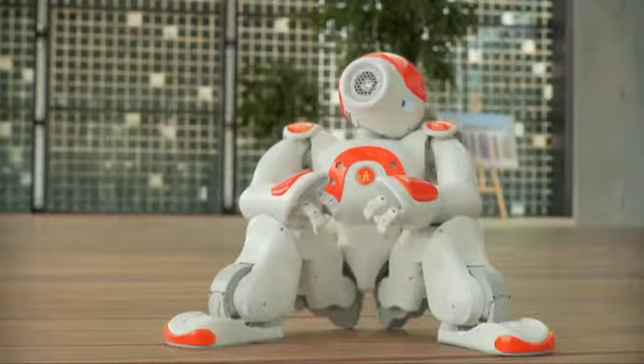I want to come with you.

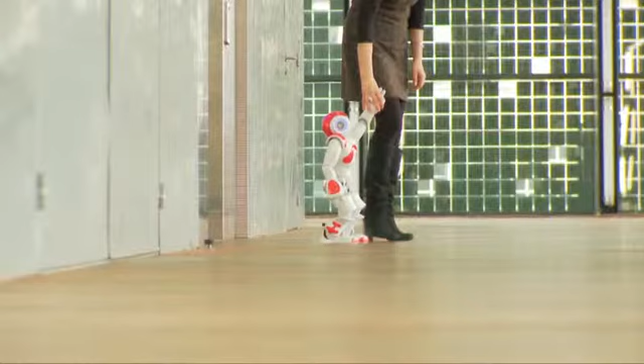Our goal with robots is to have robots helping people, and not only the geek. I want to have robots helping everyone. But in order to do that, we need to have the robot accepted by people. I'm Bruno Maisonnier, head of Aldebaran Robotics, founder and CEO of the company.

Give me something, please.

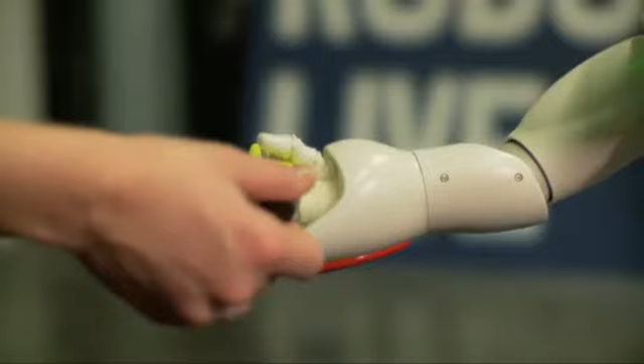Thank you. We think that the robotic market is going to be huge in the future. And this comes from the simple fact that the world population is aging very fast. And we need robots to do whatever they need at home.

What do you want me to do?

When people are depending on someone else, they need to have someone else helping them, they are in a secondary position. But when they have a robot doing that, they are in the first position, they are leading. Notre Dame University in the United States, they are really working with robots helping autistic kids. So we discovered that robots are objects they can interact with, they are comfortable with interacting with robots, they like it.

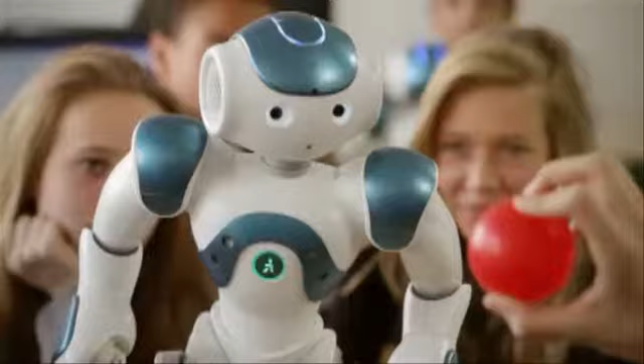The first impression that you get when you see the robots is the outside shapes. If the form is too aggressive, you won't interact with that robot. There are many people ready to develop software, but we are just lacking robots. We are just missing robots. So that's why Aldebaran began with a platform for providing all those who want to explore this new world, who want to be part of this revolution, to be able to do it.

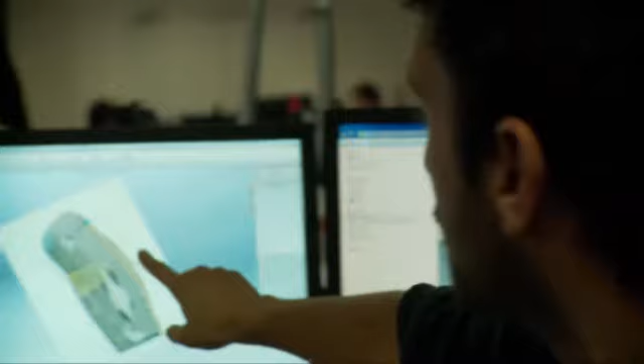I've been working for Aldebaran Robotics for 5 years as a mechanical engineer. I especially work on designing gears and integrating motors into the platforms we develop at Aldebaran. Like Ludovic, I am also a mechanical engineer. I mainly work on the shells, but also on internal parts and the structure.

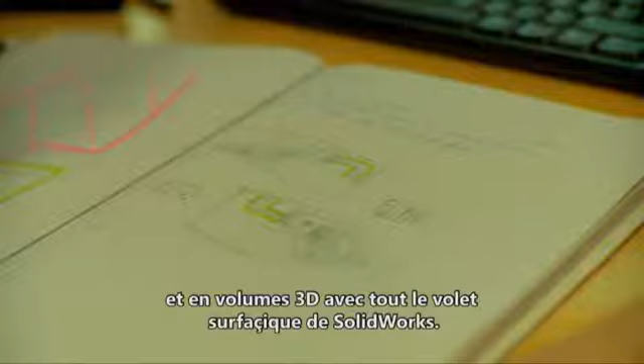For each project, the process is similar. We start with sketches, essentially 2D images, that we then translate into digital data and 3D volumes using SolidWorks surfacing tools. This gives us the ability to rotate the pieces and robots in the space and to improve the design when it's not as pure as we want it to be.

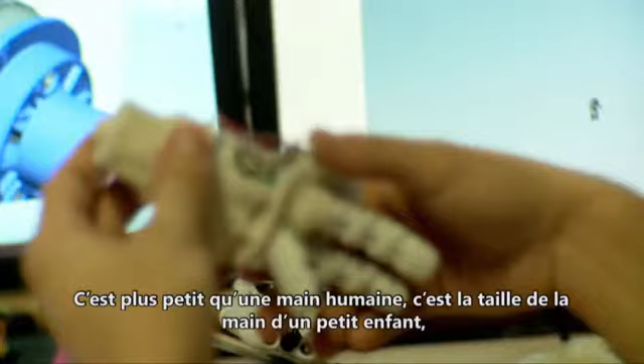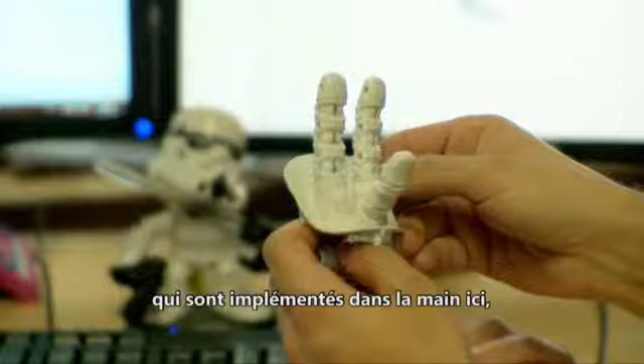So we start with the exterior design of the hand as we have here. It is smaller than a human hand. It's the size of a small child's hand. And inside there are over 100 parts just for one hand. In addition to all mechanical constraints, we have 2 degrees of freedom that we have implemented in this hand, and SolidWorks allows us to look at all the possibilities and optimize the mechanical design inside the hand.

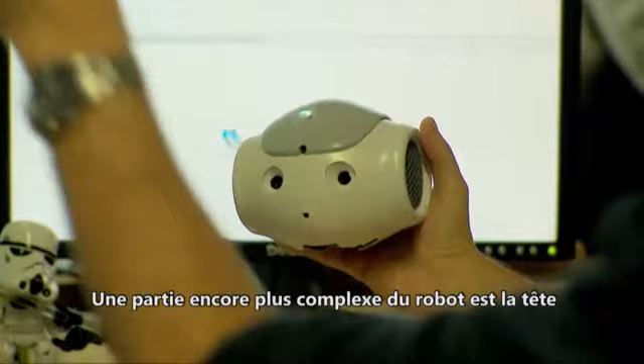Even more complex is the robot's head, which combines mechanical, electronic, and optical components, like cameras, for example. One might say that all NAO's intelligence is gathered in its head. There are also LEDs, microphones, and speakers.

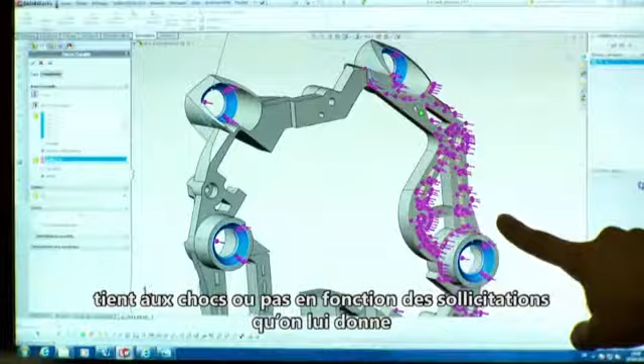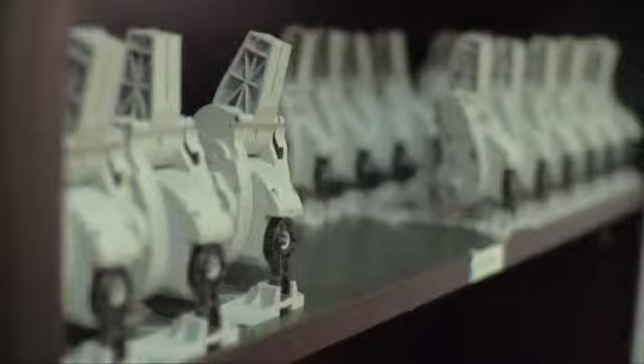We use SolidWorks Simulation, which allows us to generate digital models and know if the part will resist shocks or not, based on stresses we apply to it. And once we have proceeded with validation in SolidWorks, we can move on to production. We use SolidWorks in order to project the product into the future, and we can really optimize, really improve the parts before it exists, before it is manufactured.

You have to know that in that robot there are more than 1,200 plastic parts. On my team, there are 45 people working on the design, and I need to orchestrate the daily work and make sure that when we create new parts, the version is correct. So for that we use EPDM, and it helps us to focus on innovation while EPDM is taking care of the structure of the project.

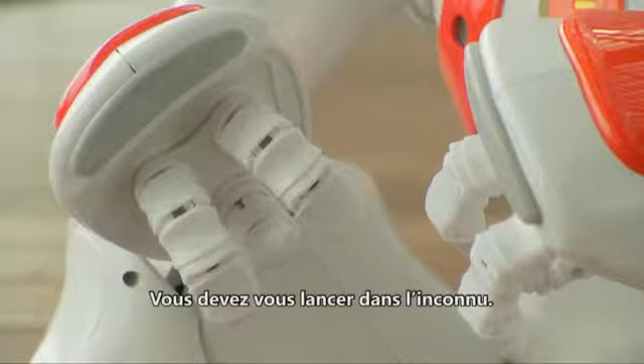I hate techno stress. I don't want to have devices that are asking me to invest intellectually to understand how they're working. So I don't want my robots to create techno stress for people. When you want to change the world, to improve things, you have to go beyond what you are able to do. You have to decide to go for something you don't know how to do. It's a new territory to conquer.

Shall we try something new today?